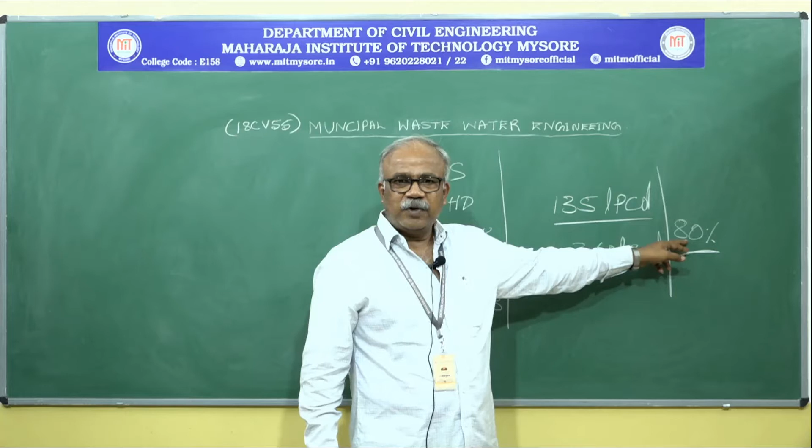This 80% is according to whatever amount we are consuming, either minimum or maximum requirement. In between, it depends on lifestyle, a person can use 220 or sometimes 260 LPCD. So this is the volume of water consumed by the individual person, and at the same time the person can generate 80% of that as wastewater.

Remaining 20% consists only of consumption, drinking purpose and wastage of water. Some percentage will be infiltration and some percentage will be exfiltration. So overall picture is 80% of the water will be wasted.

Whatever the amount of water consumed by a person or me or something else, a standard amount of wastewater will be generated by the person and also our community or something else.

This volume of wastewater will be generated in individual residential areas or individual households, or community wise. This wastewater will be collected or sent to the municipal sewer, open drains, or underground conduits. This wastewater will be collected, carried, and safely disposed to the end or disposal point, or simply what we call the treatment unit. This is the natural source of the wastewater.

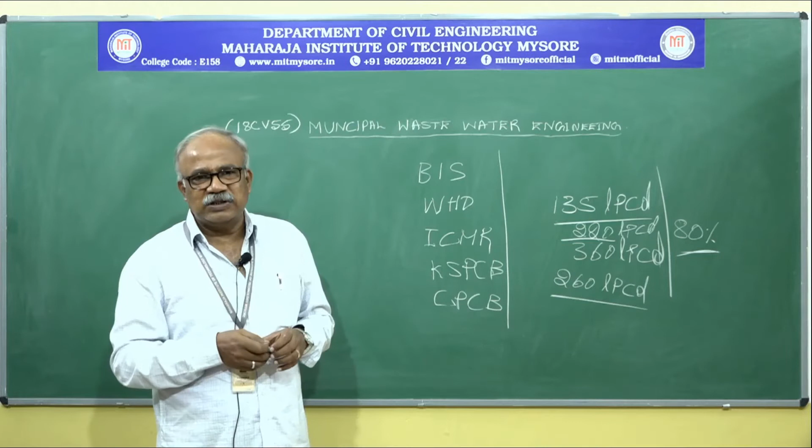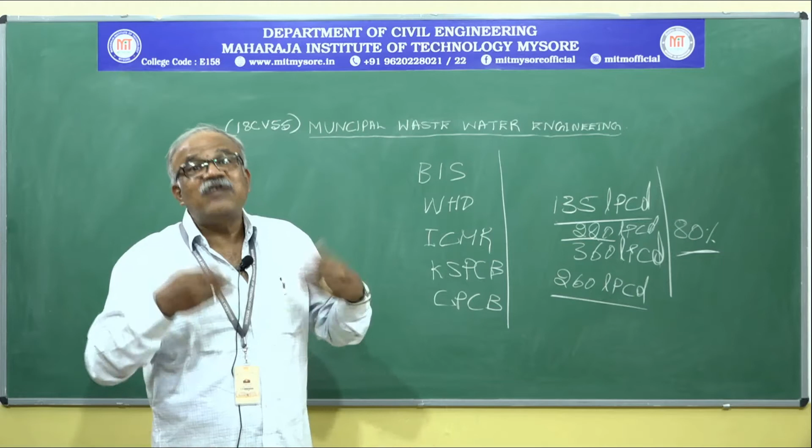That thing all of you know, because whatever we are breathing is a gift from the plants - that oxygen is given to us. After consuming oxygen, immediately we release carbon dioxide, which is utilized by the plants. This is the biological metabolism, and only then can we safely consume the oxygen. It is not available in shops or stores - it is naturally available. So this is the one step.

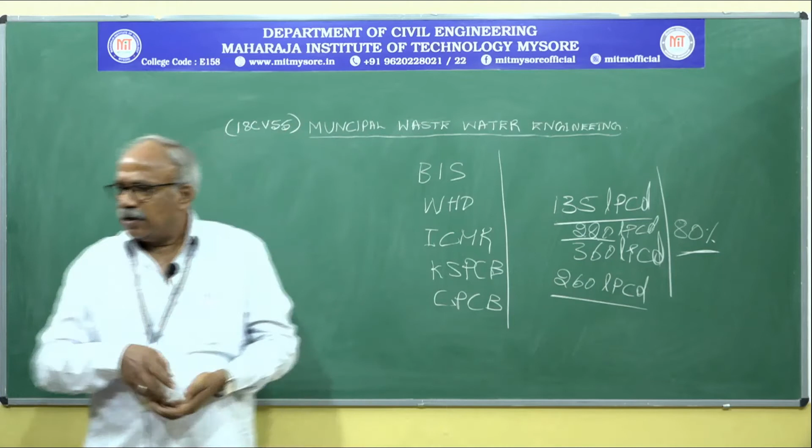Next, whatever wastewater we collect as municipal wastewater, we can go to the next step. So before going to study anything under this wastewater, or simply municipal wastewater, some notations should be known. What are all these notations?

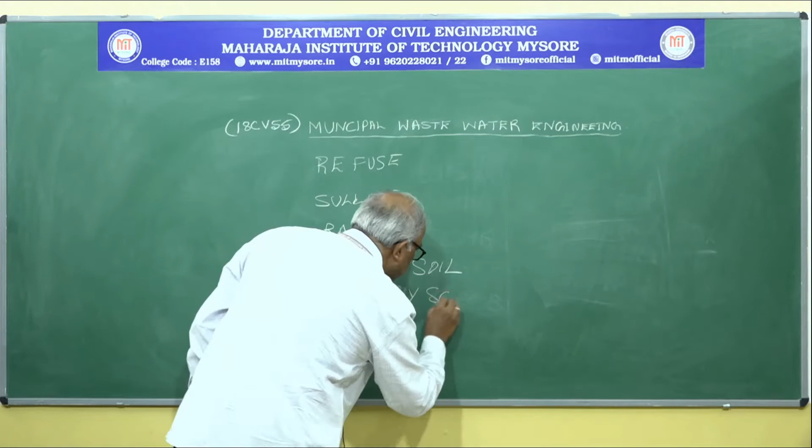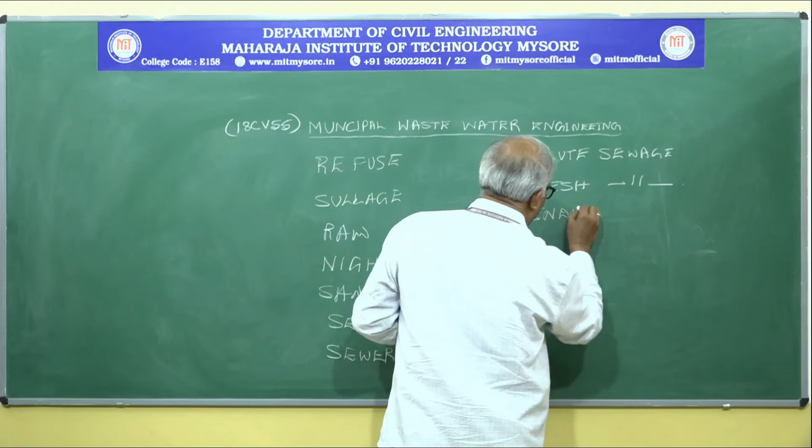So I will list out one by one: refuse, sullage, raw, night soil, sanitary sewage, sewer, sewerage, dilute sewer, dilute sewage, fresh sewage, industrial sewage, and raw sewage.

These are all the notations we regularly and normally use in this municipal wastewater treatment engineering, or simply engineering. These are notations we use every day in every class, though we don't always reference all of them. Simply we can say sewage, refuse, raw, night soil, like this.

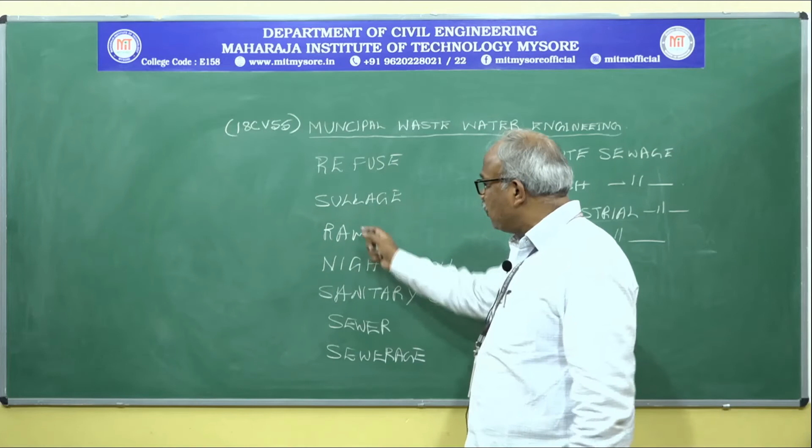So whatever it may be, what do you mean by refuse? That is nothing but unwanted, worthless material. Unwanted things or worthless material is refuse. It may be in the form of solid or in the form of liquid.

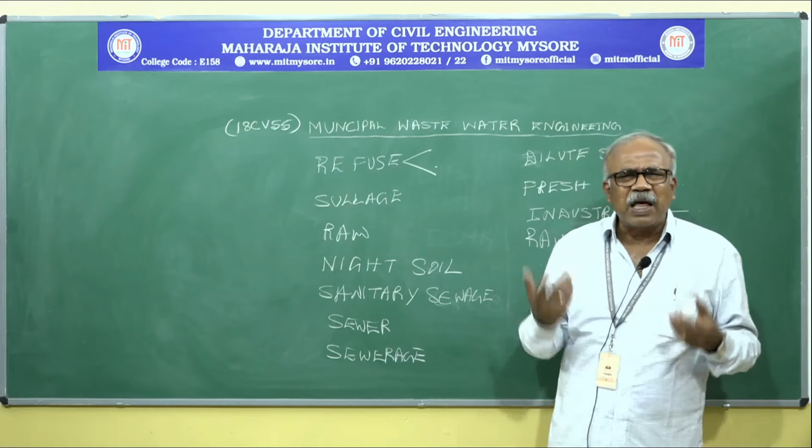This refuse can be divided into two groups: one is dry refuse, another one is wet refuse. What do you mean by dry refuse? Dry refuse is generated every day in every household - it may consist of paper, plastics, whatever unwanted things or waste materials are generated in individual households. That is nothing but dry refuse.

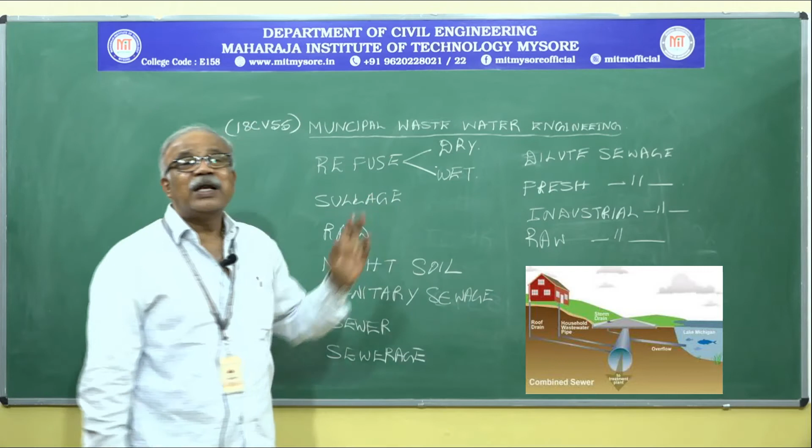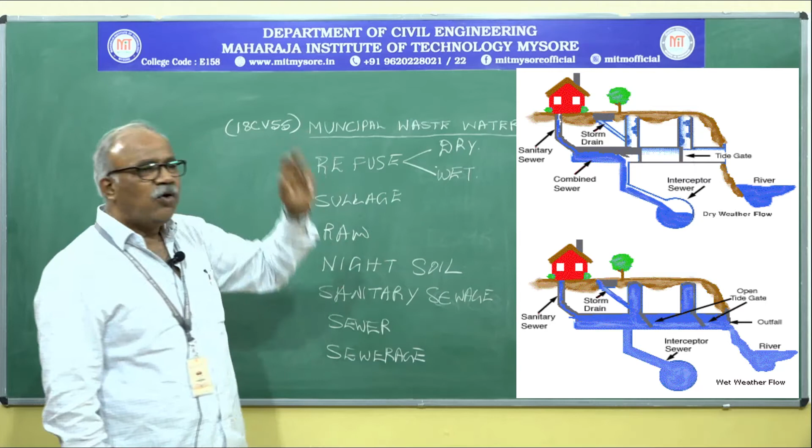Next, what do you mean by sullage? The term sullage is used to indicate whatever wastewater comes from the kitchen or bathrooms. That is nothing but sullage.

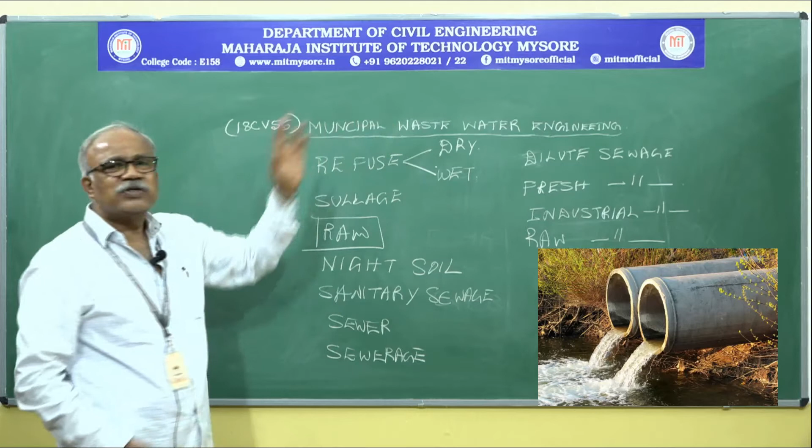What do you mean by raw? The term raw can be used not only for wastewater, but also for water. So for consumption purposes, we get water in two ways: one is surface water, another one is underground water. When compared with surface water, underground water is safest because it will not contaminate much.

Surface water is exposed to the atmosphere. Due to meteorological factors like wind blowing, wind speed, wind direction, or other natural phenomena, some percentage may be contaminated. In such a way, before going to consumption, we have to treat it up to the standards already mentioned in the previous class. As per the standards, we have to treat it in a proper way - either preliminary treatment, primary treatment, physical treatment, or chemical treatment by the chemical treatment process.

Before treating water we extract for consumption, whether underground or surface water, before treatment we simply call it raw water. Same way with wastewater: whatever we collect from individual households, commercial or industrial waste, all of it is collected, transported and safely disposed at a treatment plant. So before treating such contaminated wastewater, we call it raw wastewater, before treatment.

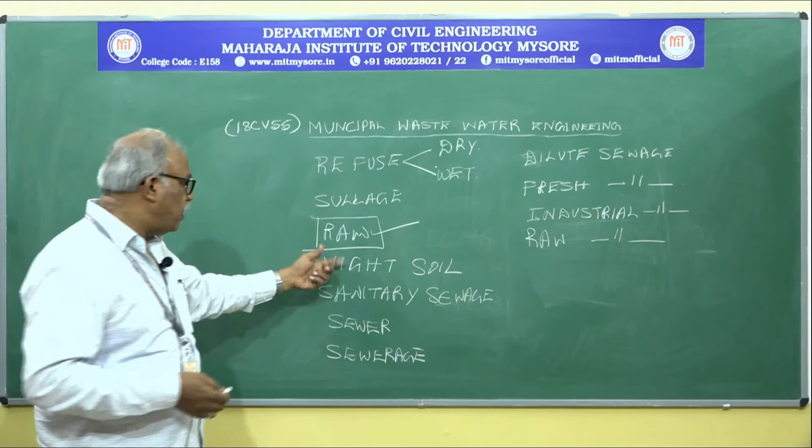Next, what do you mean by night soil? The term night soil is used to indicate whatever human excreta or animal excreta is produced, simply we call it night soil.

Next, what do you mean by sanitary sewage? Sewage is nothing but wastewater. Sanitary sewage means whatever wastewater we get from individual households or community, it may be from latrines, kitchen, or bathrooms, that is what we call sanitary. The term sewage is common to use for sanitary, industrial, or other fresh wastewater. Sanitary specifically means waste generated from kitchen, bathrooms, or latrines.

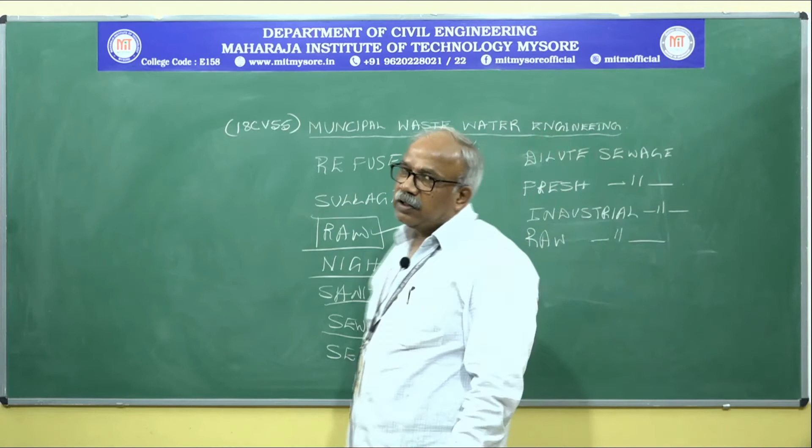What do you mean by sewer? Whatever wastewater we collect, either from individual households, residential areas, community, or any industrial or liquid waste, should be collected and conveyed to a treatment plant. That is nothing but sewer, nothing but conduit.

Next, what do you mean by sewerage? This is nothing but the entire science of collecting, conveying, and safely disposing. Whatever wastewater we collect from sanitary, industrial, residential, or community sources, the entire process of collecting, conveying, and safely disposing it to a treatment plant or process, that is nothing but sewerage.

Next, what do you mean by dilute sewage? Whatever wastewater we collect from individual community, households, industry, or commercial restaurants, its concentration we can't analyze directly, it may be strongly or leanly concentrated. Such wastewater when mixed with natural waters has its concentration diluted or reduced. That is nothing but dilute sewage.

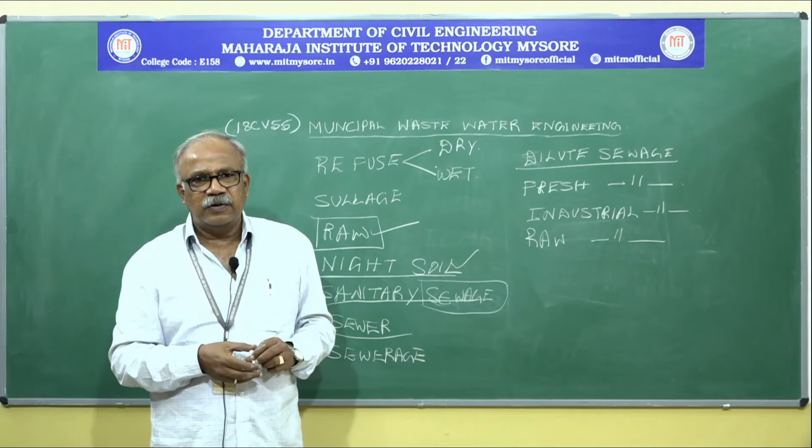All of you have completed the chemistry lab, where wastewater analysis regarding DO concentration, BOD, and COD experiments was done. It's sometimes difficult to conduct BOD and COD because it depends on the concentration of wastewater. In that situation we use dilution factor, meaning varying concentration like 10%, 20%, 30%, 50%, 70%. So whatever waste we get can be mixed with water, that is dilute sewage.

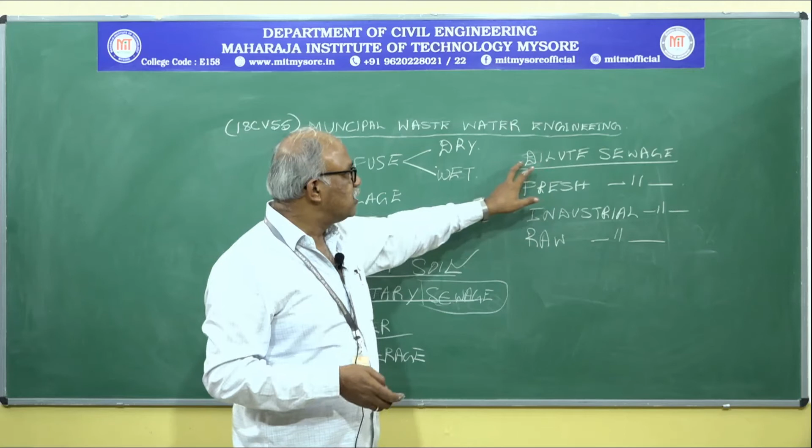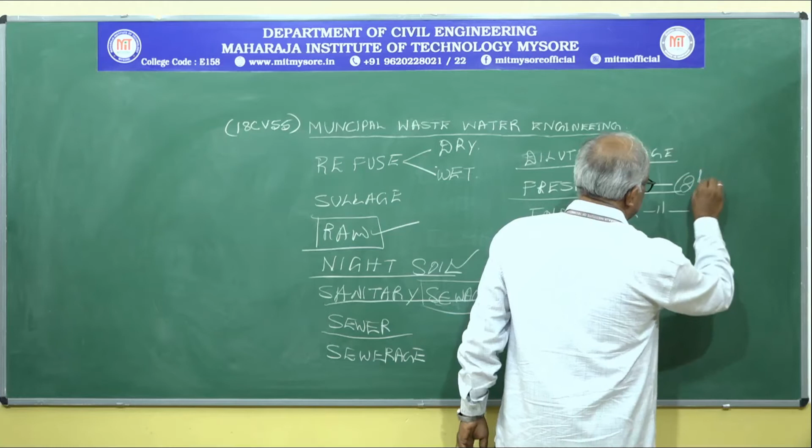What do you mean by fresh sewage? Whatever wastewater is generated freshly in individual households, immediately, within 2 hours, that is fresh sewage. Once it crosses 2 hours, it is not fresh wastewater anymore, it starts decomposing or creating a nuisance, depending on the bacterial concentration, since different types of bacteria are available in the fresh wastewater.

Next, what do you mean by industrial sewage? Any type of industry produces what we call industrial wastewater, regardless of its characteristics. Industry may mean tannery, textile, food processing, steel, nuclear power, cement, or various other industries. According to their manufacturing process and end product, they generally generate acidic wastewater, depending on the product. For example, take tannery industry or textile industry.

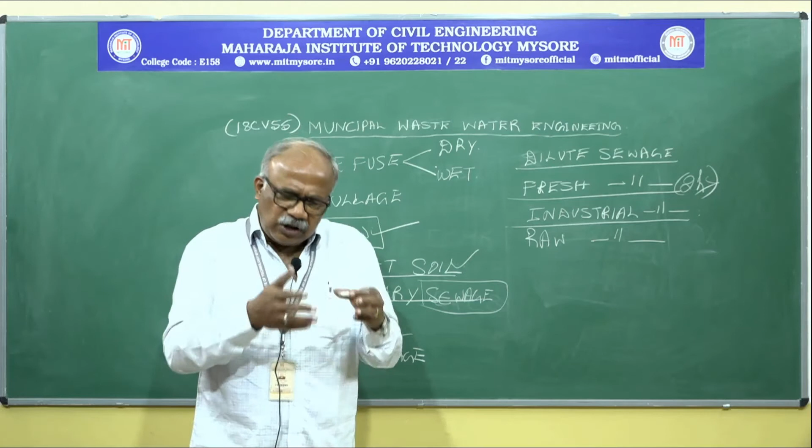Take for example the tannery industry, where the end product is leather. Different animal skins are taken to make pure leather. Whatever hair the animals have must be removed from the skin, which is not an easy process. In each and every unit, they use acids, acid-oriented chemicals. From beginning to end, there are 10 to 15 units that must be passed to get pure leather. Initially the thickness of the animal skin is more than 10 mm.

Finally we have to reduce it to 2 to 3 mm, and at the same time remove each and every hair. The process is lengthy, and in each and every unit they use acids. Whatever chemicals they use in the process, they generate wastewater with the same characteristics, meaning acidic wastewater is generated. Simply we call it industrial wastewater.

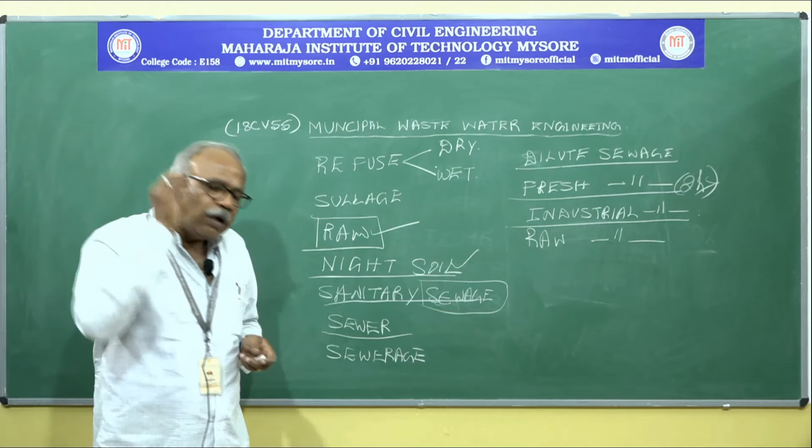Different kinds and types of industries are there, and we are not expecting the same characteristics of wastewater in food processing industry. Even though food processing industry also uses some acids, compared with textile or tannery industry, it is a negligible quantity. In that situation, simply we say industrial wastewater, not analyzed characteristic-wise initially. But when we go to collect the wastewater individually, the engineer has to think about the duty, whatever type of treatment should be given to treat that industrial wastewater.

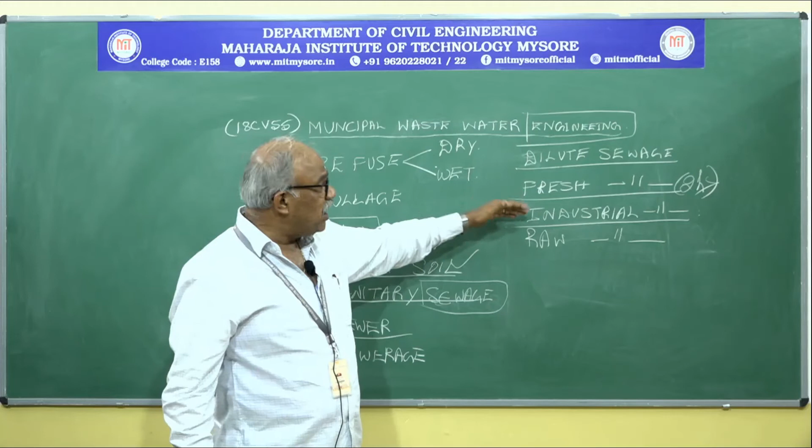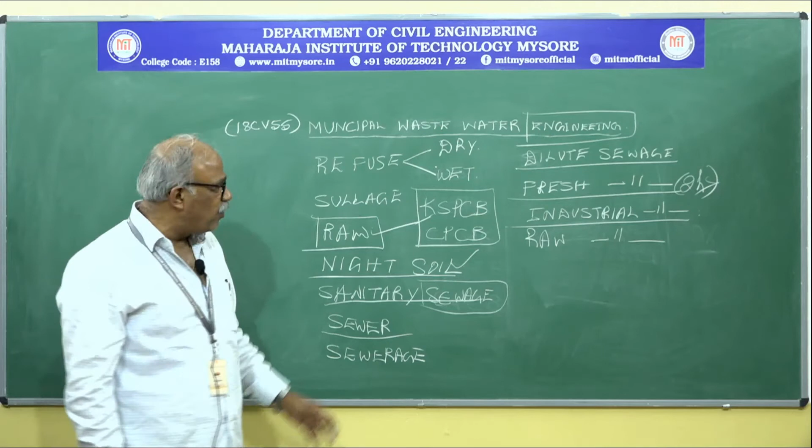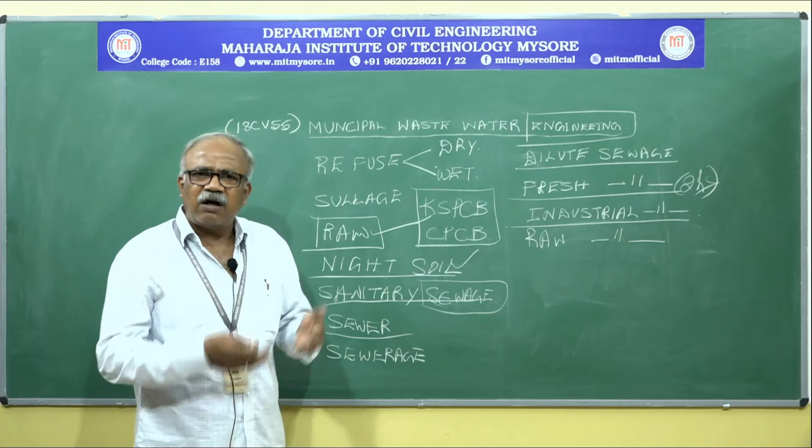Preliminary or primary treatment is common to all types of wastewater. But to maintain a standard according to KSPCB or CPCB, that is Karnataka State Pollution Control Board or Central Pollution Control Board, they make a chart. Whatever wastewater is generated by individual residentials, community-wise, or different types of industries, they are not able to dispose of it directly, because it spoils the environment. They have to maintain certain standards and follow according to the individual waste or individual industries, whatever type of wastewater they generate.

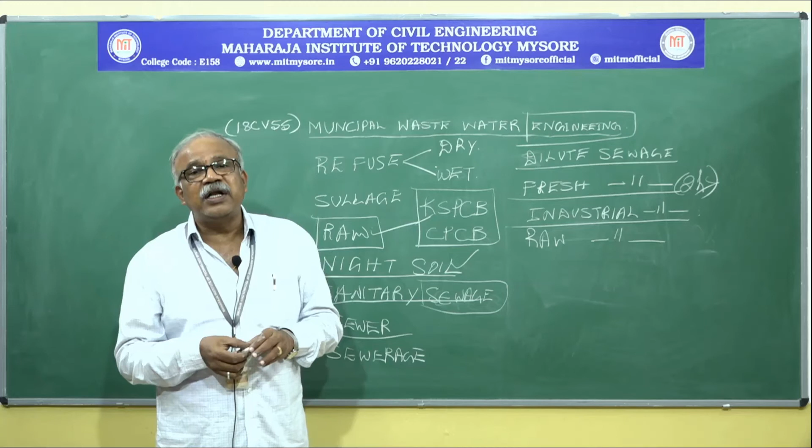So the engineer has to think how to treat such wastewater, either by secondary or tertiary treatment. Nowadays in developed countries, to treat such wastewater they are not using any chemicals. Naturally they try to treat industrial wastewater by biological methods. For example, even last semester I mentioned very clearly regarding the water treatment process.

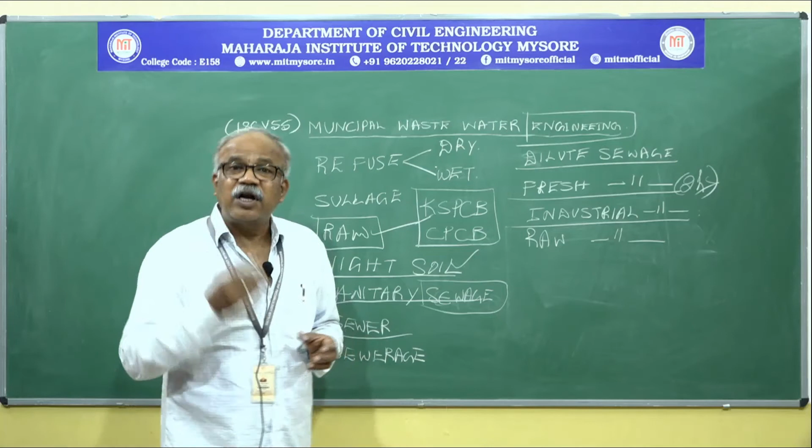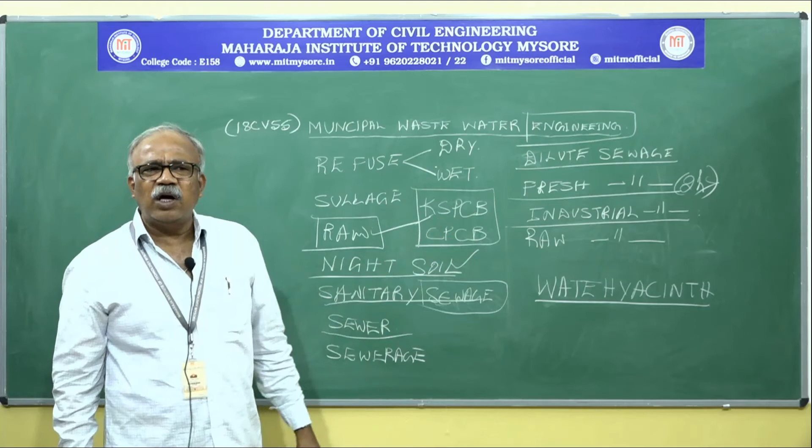There is a very small plant, water hyacinth, naturally available. If you take just 10 plants, they can multiply in an ordinary environment up to 6,50,000 plants within a duration of 8 months.

In ordinary environment, if it is in a wastewater treatment plant, using this same water hyacinth plant, it can multiply at a faster rate because nutrients are available for plant growth. What are the nutrients in wastewater for plant growing? Nitrogen and phosphorus. So if you observe, wherever you look at a wastewater pond or ditch, some plants will be growing on that wastewater body - it may be water hyacinth, duckweeds, or seaweeds. Day by day, they cover the entire surface of the wastewater or water body.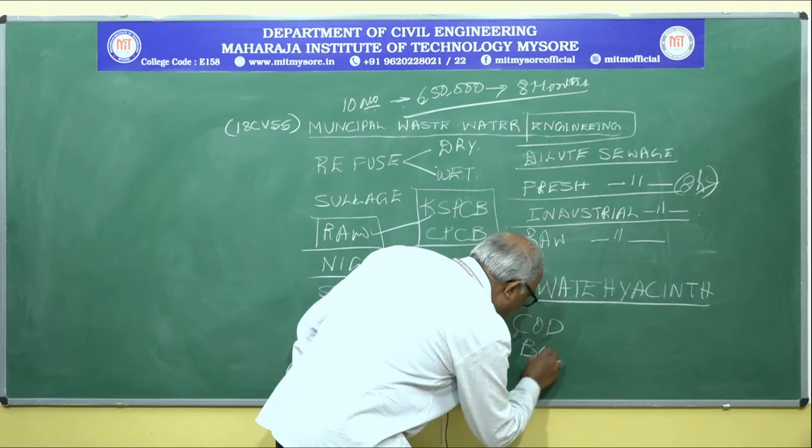So automatically they help to remove COD and BOD. One of our MTech students, using this water hyacinth plant, did a project to treat sugar industrial effluents. He constructed a very small tank, 1.5 foot by 5 foot length, 1.5 foot depth. He tried it for 8 months using industrial wastewater to treat it with this water hyacinth plant. He succeeded in removal of COD and BOD - 89% and 86% - within the duration of only 8 months.

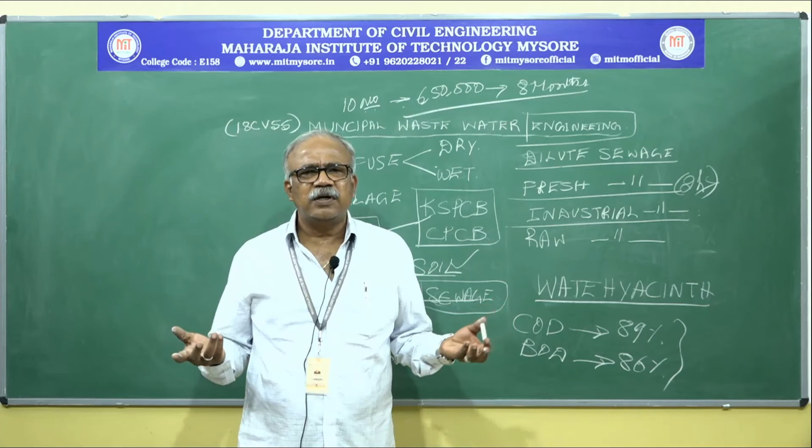If we try constructing a larger tank and use this water hyacinth, we can definitely succeed in removing more than 90% or 95%. In developed countries, they have plenty of land. But compared with chemical treatment process, this biological treatment process is lengthy. It takes more time because we are not using any chemicals to treat such industrial wastewater or municipal wastewater.

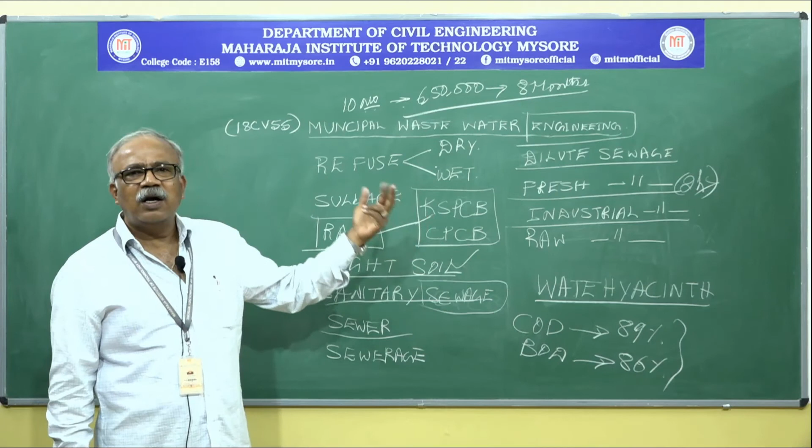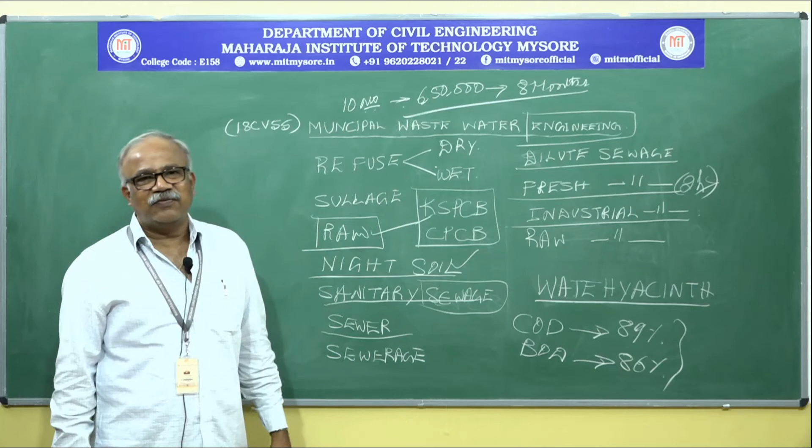Even though within 2 or 3 days, definitely we can succeed to treat such a type of industrial wastewater or municipal wastewater. Immediately we can succeed within an hour, within 1 day or 2 days, depending on the characteristics of wastewater. But it directly affects animal life, plant life, human beings. Overall environment can be spoiled.

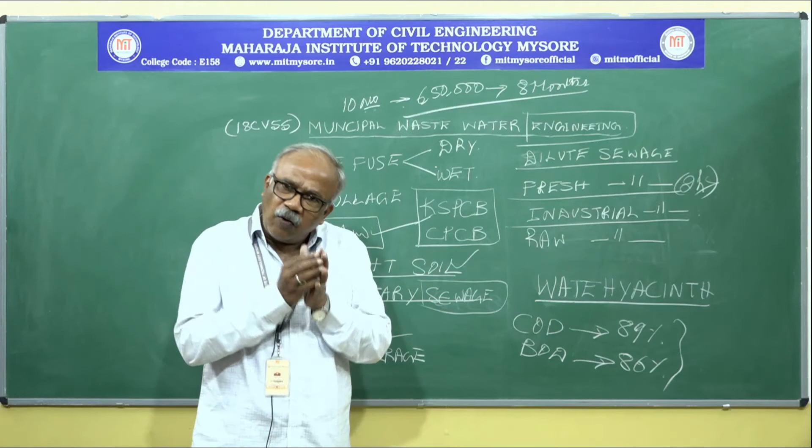To avoid that, in developed countries they are strict on use of biological treatment processes. They only use plants, that's all. Simply they construct a tank filled with wastewater and put some plants. It may succeed, it may take 2 months or 3 months, depending on the characteristics of the wastewater.

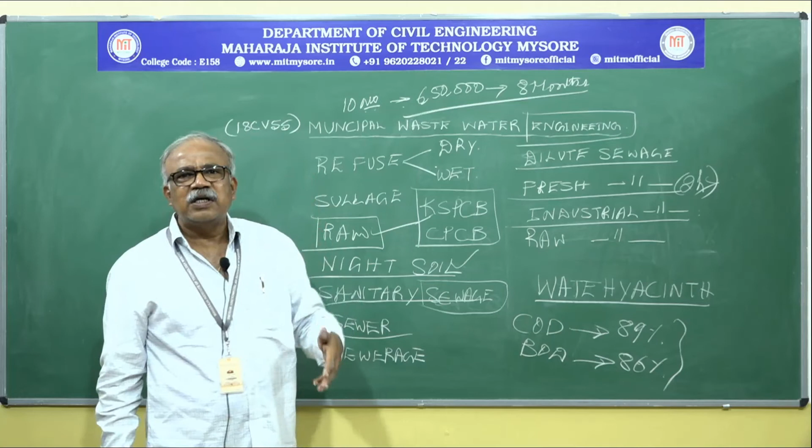Even though municipal wastewater can be treated easily, why? Because it is organic in nature. All municipal wastewater comes under organic in nature. Why organic? Because we get more wastewater from urinals, bathrooms, kitchens, urinals majorly. So all industrial wastewater comes under inorganic in nature.

Why inorganic? Because they use more acids. I mean to say COD is always more than BOD. BOD is less in inorganic in nature. In any municipal wastewater, BOD is always more, COD is always less. It is very easily treatable compared with industrial or inorganic wastewater.

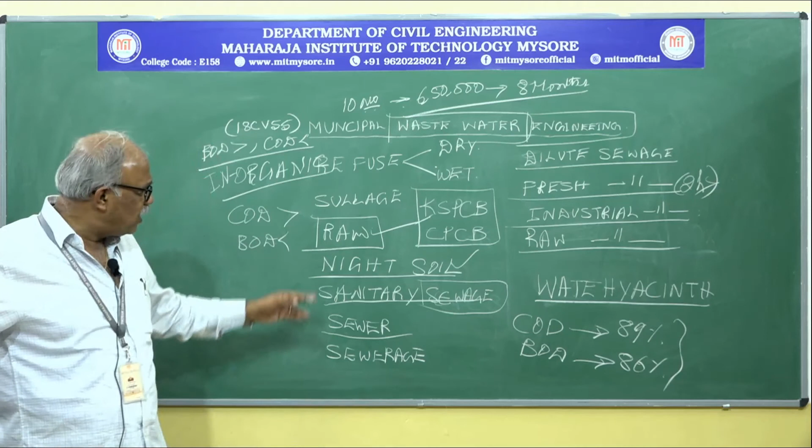Are you clear or not? So this is the major concept of this wastewater. And finally, raw industrial wastewater. What do you mean by raw industrial wastewater? I already mentioned very clearly why, where, and when we are going to use this term raw. Not only for industrial wastewater, not only for municipal wastewater, not only for some other wastewater, we are going to use this term raw.

The term raw is used for whatever water we are getting for our consumption, either underground source or surface source. Before going to treat any water or wastewater, we use the term raw. Are you clear or not? Raw.

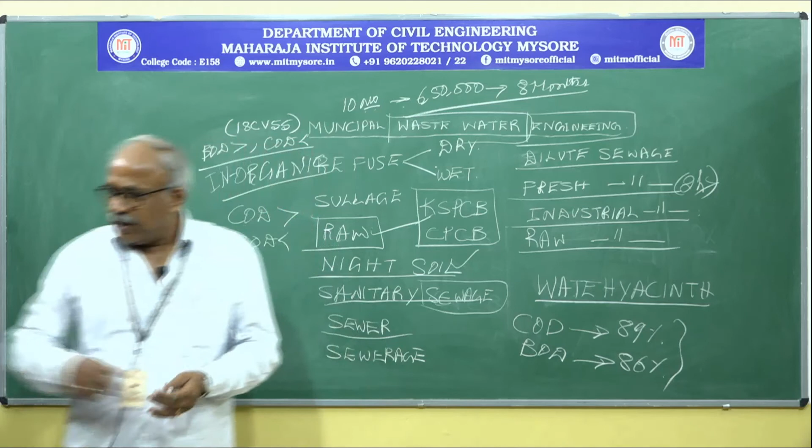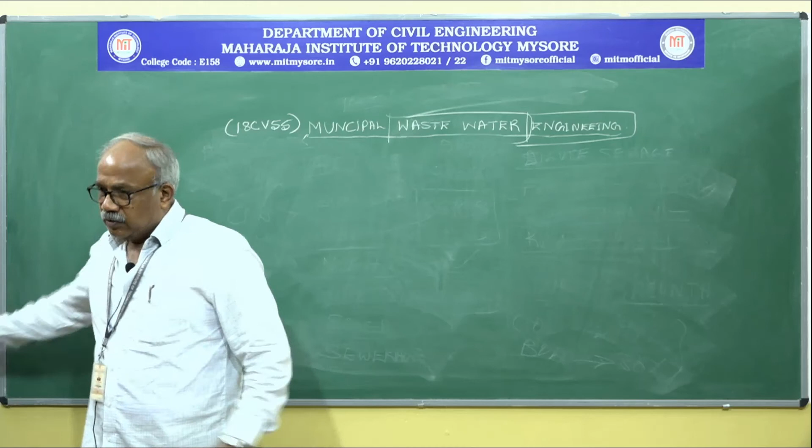After knowing this concept of wastewater, next I move on to the first module. What is the intention of the first module? I already mentioned very clearly, the overall subject of this concept is to maintain a good environment, and it should not affect human health, animal life, or plant life. This is the main concept of this municipal wastewater.

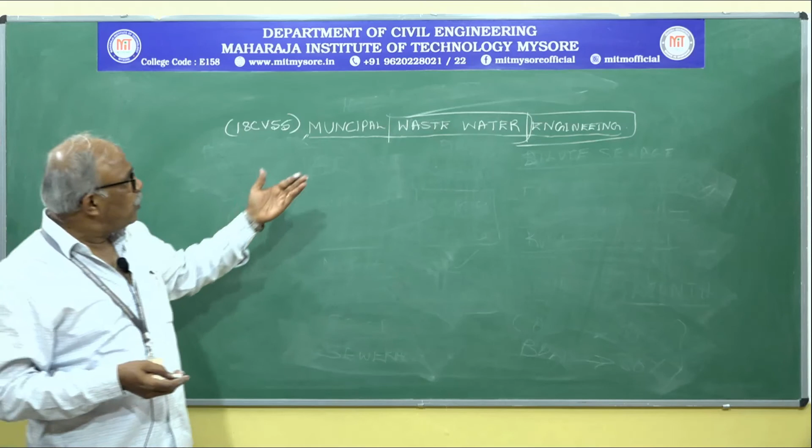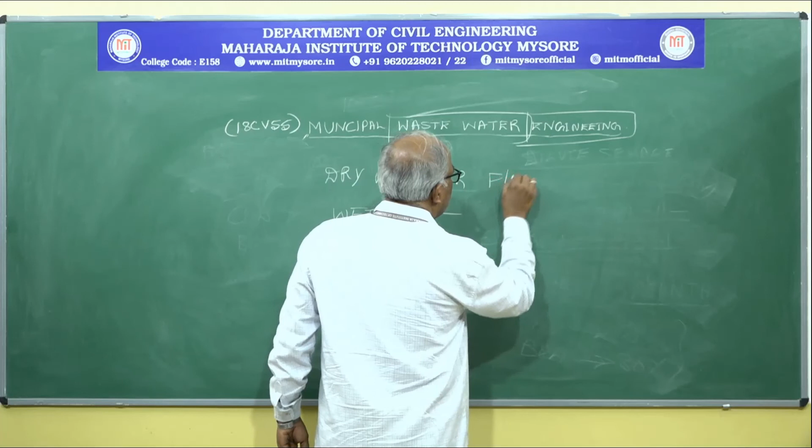Under the first, so before going to first, another 2 bits: one is, what do you mean by dry weather flow and wet weather flow? These are the 2 points that come under collecting of this wastewater, either municipal or industrial, whatever it may be. So dry weather flow means flow - the term flow, all of you know, moving of water or wastewater.

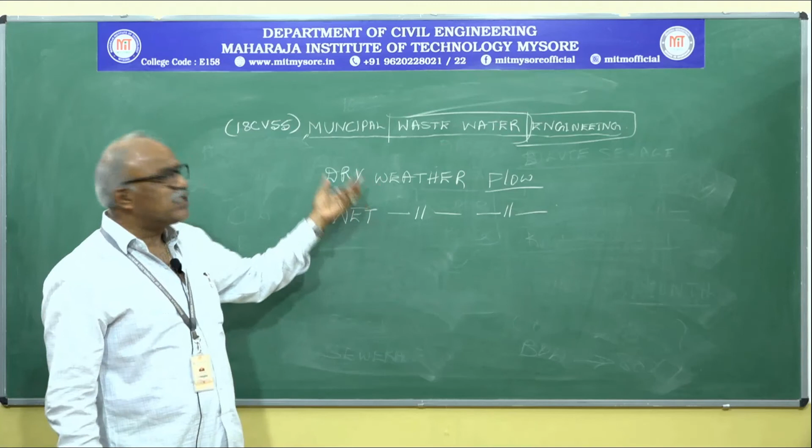What do you mean by dry weather flow? The name itself indicates dry season. In the dry season of the year, the wastewater will be flowing. How to collect this? This can be collected in different manners. Whatever different types of solid materials, we have to collect separately, we have to dispose separately, because there are 2 concepts: flammable, inflammable.

There are 2 concepts you have to keep in mind while collecting unwanted things or useless materials. Okay, in dry season, for example, garbage, paper, plastic can be collected separately, and the remaining wastewater will be flowing in the dry season.

So what do you mean by wet weather flow? The term wet indicates moisture content, which is overall throughout the year. So where exactly throughout the year can we expect this wet weather flow? Only in the rainy season we may expect this wet weather flow.

Even this wet weather flow, we have to collect the wastewater either separately or singly. I mean, whatever rain falls in the rainy season, storm water, simply we call it storm water. Storm water is also allowed in the same municipal sewer, or it is collected separately. Normally the storm water can be collected through the municipal sewers.

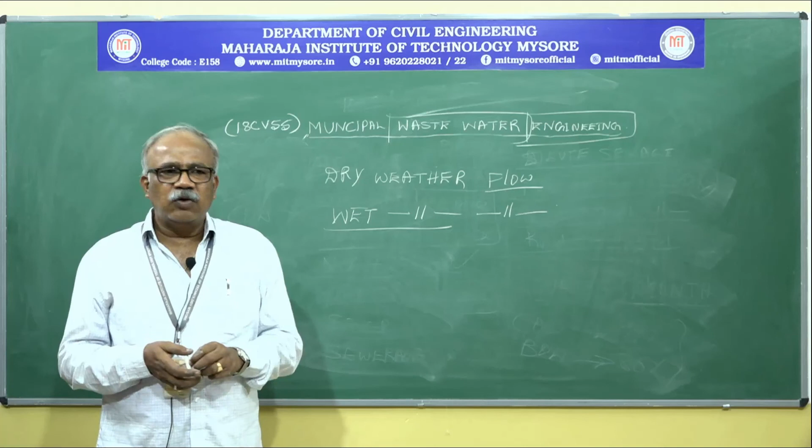Right, so okay, up to this level I will stop. In the next class, I will start how to collect the wastewater, how to convey the wastewater, and how to dispose it to the treatment unit. We can discuss this even in the next class. Okay, thank you.